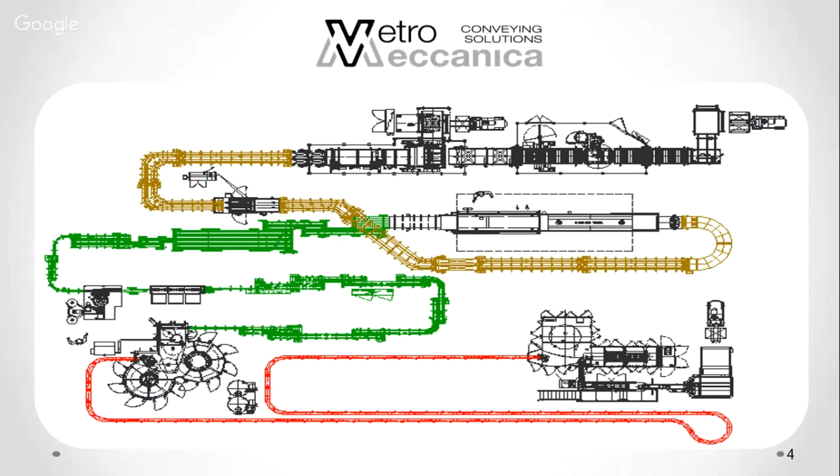Today, Daniela Rinaldi is the sales manager for Vetromeccanica since 2004 and the CEO since 2007. Today she is going to be our presenter. Daniela is a Pavia College graduate with a bachelor's degree in economics and a master's degree in development of small and medium-sized enterprises. Her first role at Vetromeccanica was sales manager, a position she started back in 2004.

Daniela is Vetromeccanica's CEO, a position she adopted in 2007 and has held for 10 years. She is responsible for leading the development and execution of the company's long-term strategy, such as development of custom conveyors and conveyance systems with a strong determination on improvement and development. With all that being said, I will now turn this over to Daniela, and she is going to get much more in-depth on what Vetromeccanica can do for your conveyance solutions. Go, Daniela.

What you see there is an example of a bottling line, from a blow molder till the palletizer. We are in charge of all the conveyors in between the machines. That means manufacturing and engineering, mechanics and automation, and the engineering of the system, because the most important thing in a line is the accumulation and the buffer between the machines.

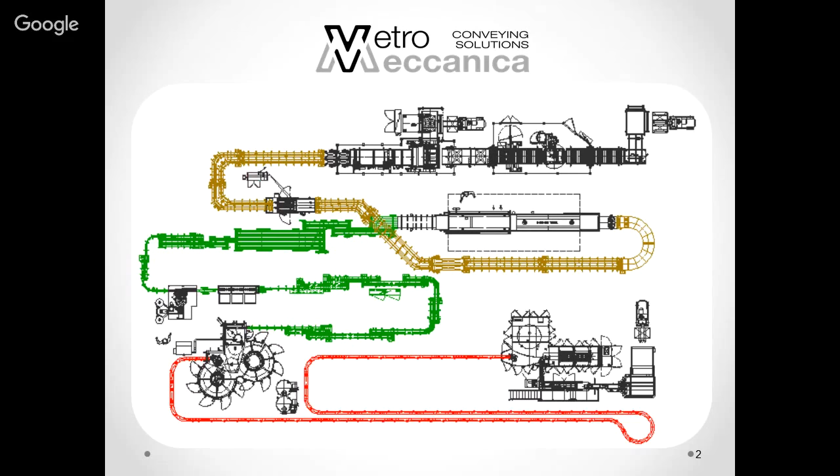We are located in Parma. All this data Maribeth told you before, so it's quite easy to go ahead.

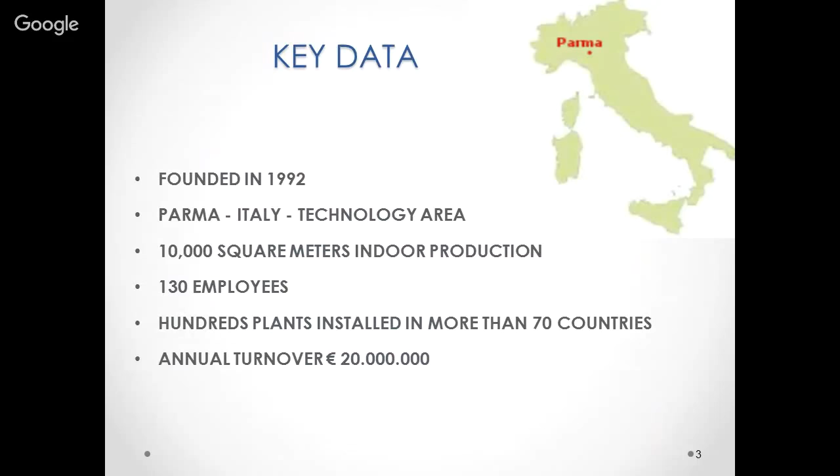We supply engineering and new conveying solutions. We have a pretty complete service, from the technical department till the commissioning of the line. So we can follow the customer from the beginning till the end, from engineering till commissioning. And after commissioning, because lines need upgrading and maintenance, and all this to keep the good efficiency of the line.

We have the help of many technicians all over the world, in North and South America, Middle East, Germany, and North Africa, and we can grant remote assistance from Italy.

What we do is quite unusual, because we manufacture everything inside. It means we begin from the stainless steel sheet and develop all the solutions inside. This means tailor-made and customized solutions, and short delivery terms. For example, our medium delivery term is 45 or 60 days from the PO.

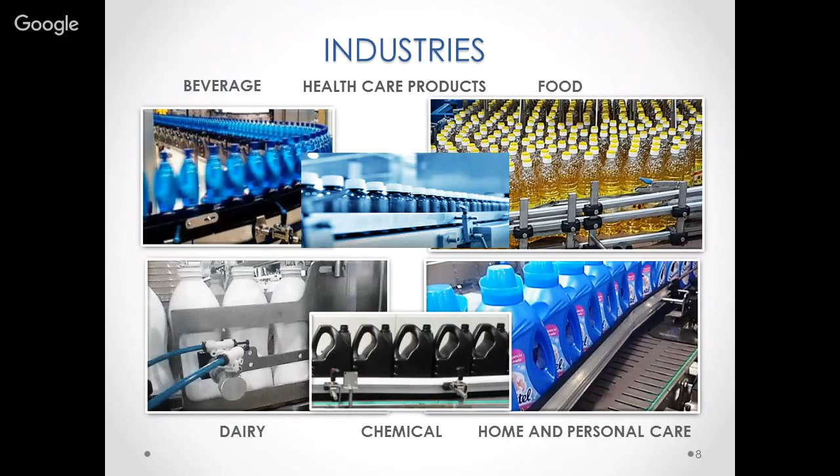We are dealing with different industries: beverage, as I told you, healthcare, food, chemical, dairy, and home care and personal care. This means everything can be moved: bottles, cans, containers in general, full and empty.

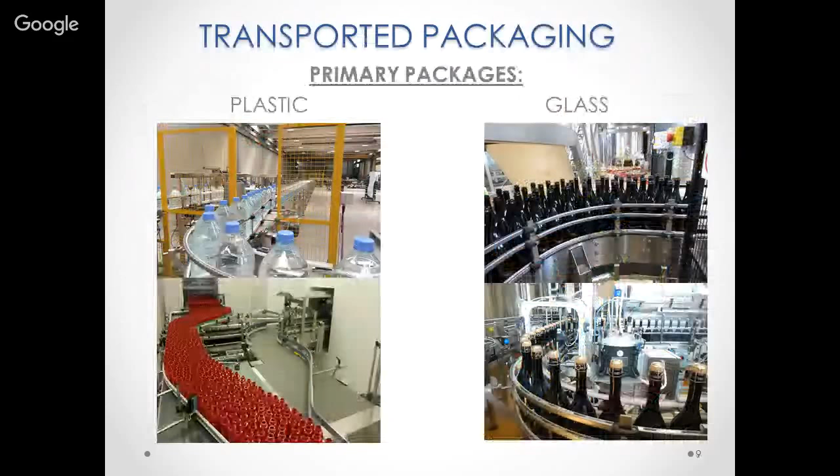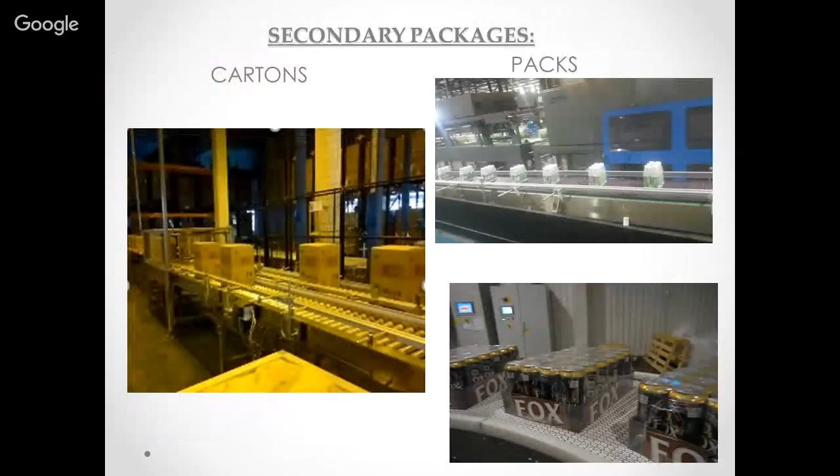Different materials too: plastic, glass, and again cans, empty and full. Flow pack, I forgot, jars, and everything else. And then we move also packs, cartons, shrink packaging, and everything that is in a box, more or less.

We have a quite big product range: bulk conveyors, air conveyors, tabletop conveyors, and can conveyors. It's all conveyors. Dryers are machines you can install just before, upstream of a labeling machine, to dry a bottle or container before putting on a label, because if the bottle is wet, the label cannot be attached well. Then there are dividers, aligners, and all this stuff related to the conveying system inside an industry.

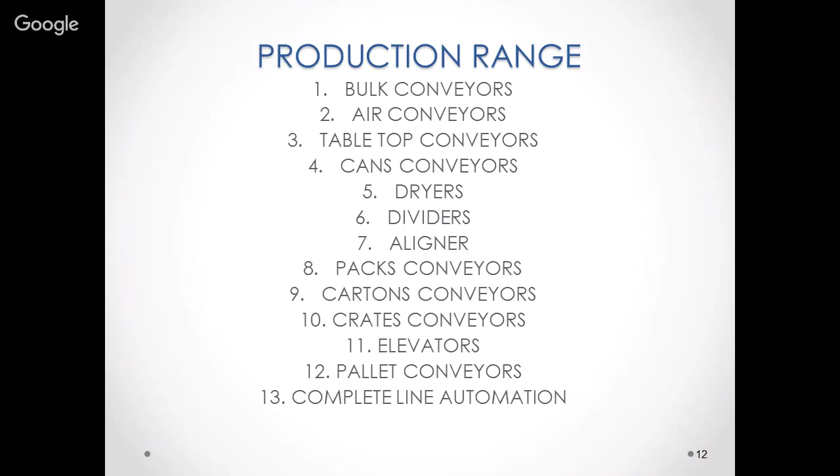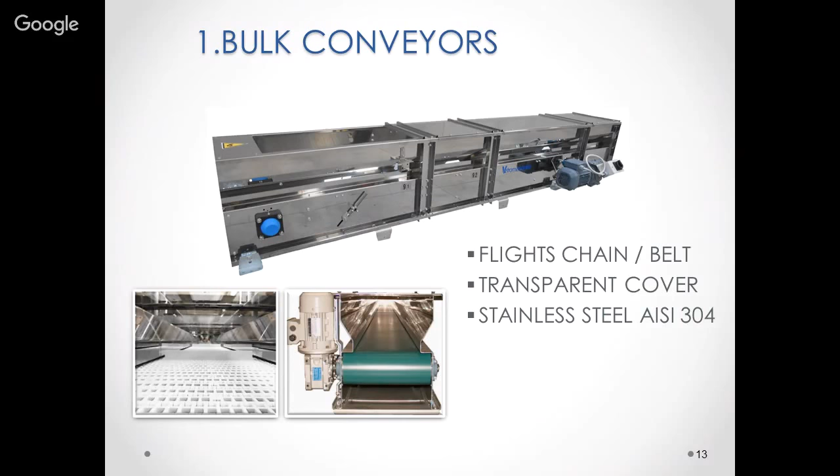We have air conveyors, our first product. We began several years ago with this product. We move empty bottles from a blow molder to the filler, moving them with air. This is our core business and has been for years. So we are very specialized, and I think on the market we are the best solution in terms of quality, price and delivery terms, because we were very specialized for a very long time.

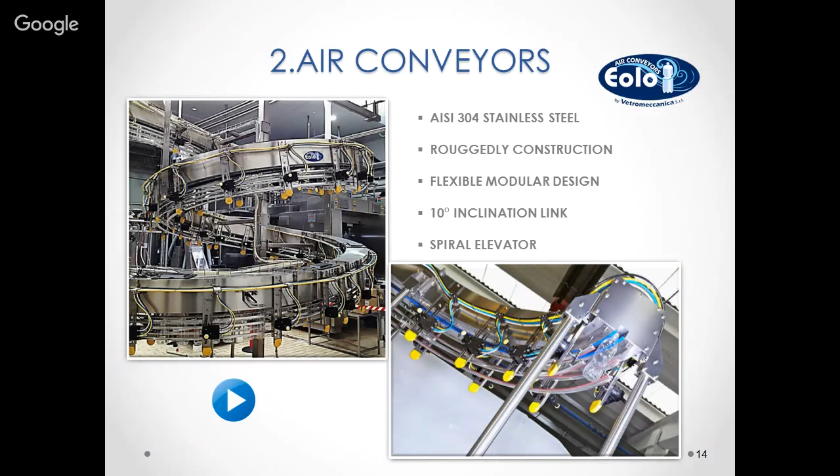All this stuff are items and devices that equip our air conveyor. For example, I can show you a short video just to give you an idea of what an air conveyor is and what you can... no, it doesn't work, I'm sorry.

What you can move - on the left you will see a standard air conveyor system equipped with this pneumatic actuator device that we call the Eolo moving device, which is a patented system that allows adjustment of different body diameters with the same items. We have special neck guides with this plastic material, we have cylinders, and in general different types of guide registration, from the simple to the most complicated one, which is the EMD.

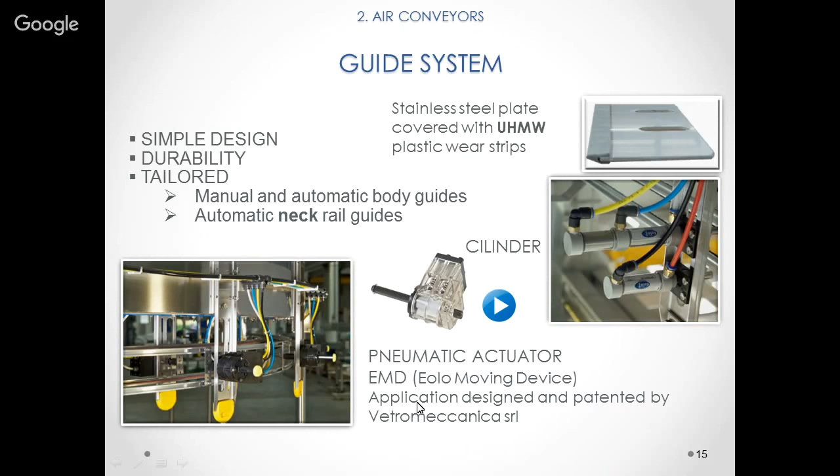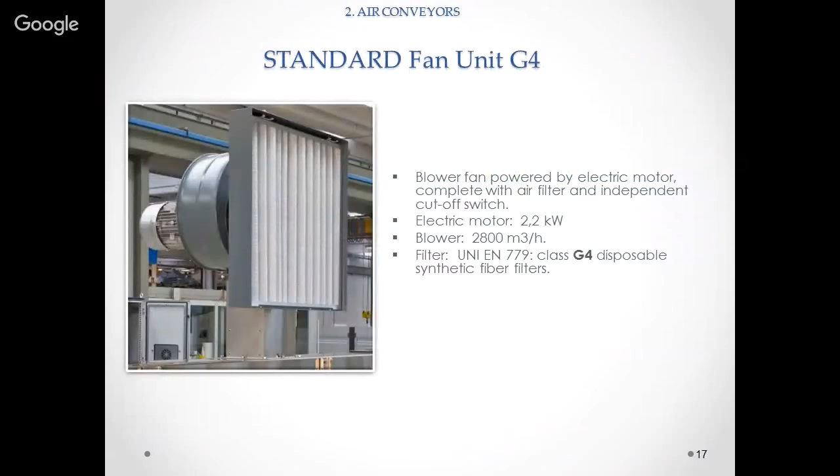This is the time of changeover. On the air conveyor, you can have different types of filters, from the easy one, which is a G4, till the most complicated one, which is a 3-stage filter: G3, F7, H14.

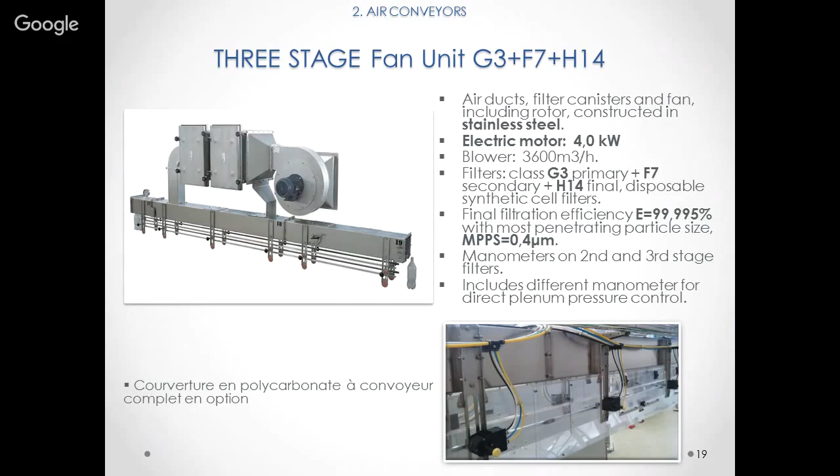This is for very special industries, for example milk or yogurt in general, when you need very good filtration because of bacteria or contamination. So you have to be sure the air inside the air conveyor is as clean as possible. You also have the possibility to cover the air conveyor, just to protect it from dust.

Then we have tabletop conveyors. Once a bottle has been filled by the filler, you have to move the full bottle from the filler to the labeler. For example, a Coke bottle has been filled, then you have to put the label all around the bottle, and you need conveyors doing that. We have all this stuff - they are not just simple conveyors but whole systems, because you have to accumulate bottles and then align them, since when you have a very high speed line, you need a big buffer between bottles.

Just one second, I was trying to show you a video, but it doesn't work.

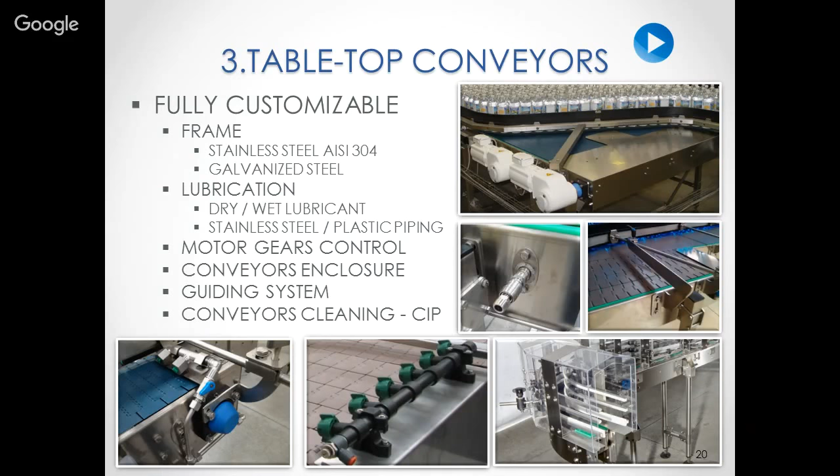So vacuum conveyor, this is a different industry, used for home care or personal care. This is a line we sold a couple of years ago to Heinz, for ketchup if I remember well. It's a vacuum conveyor because these bottles are empty. They cannot be moved using an air conveyor because they have no ring on the neck, so they can't be suspended there, but they can move on the tabletop conveyor. Since they are empty though, they will fall down by moving, so we are obliged to apply this vacuum system to keep the bottles just

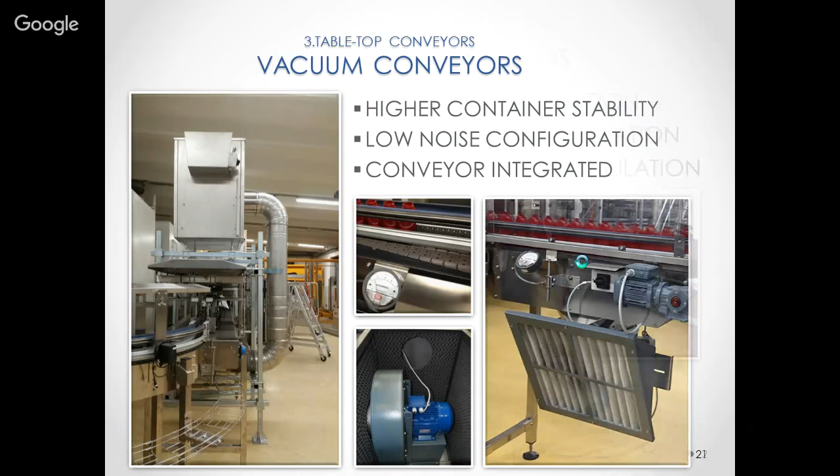in contact with the plastic of the conveyor. You will see there are holes on the chain, and underneath there is a motor doing a vacuum. Then we have the accumulation system.

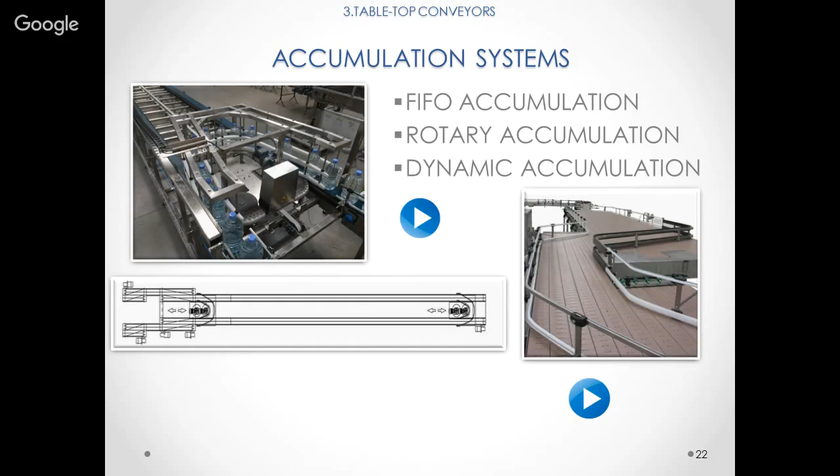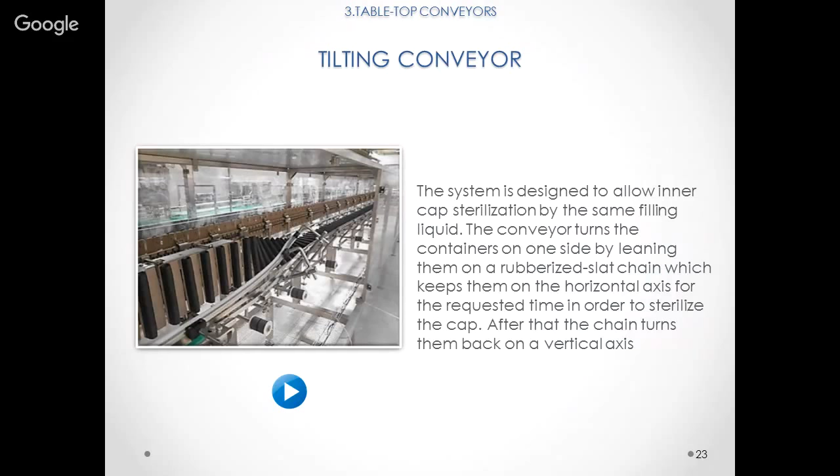This is a special equipment we call a tilting conveyor. It's designed to allow cap sterilization. When you have a hot filling system, the liquid inside the bottle is hot. You tilt the bottle and the hot liquid will touch the cap. This way you can sterilize the cap and avoid bacteria on it.

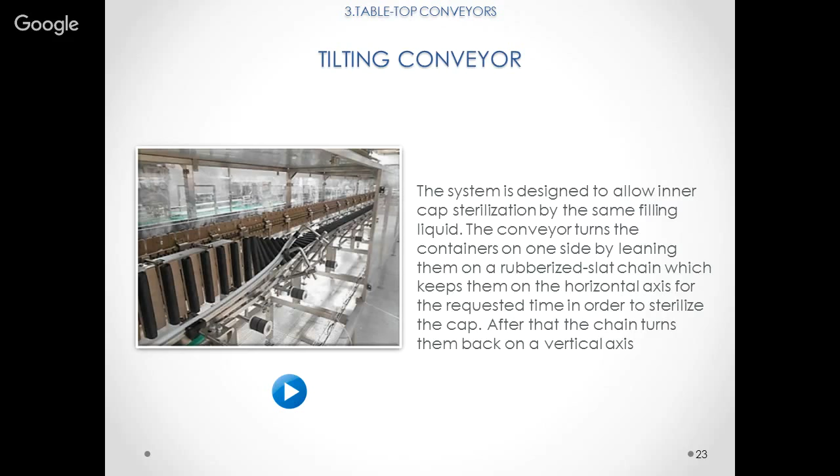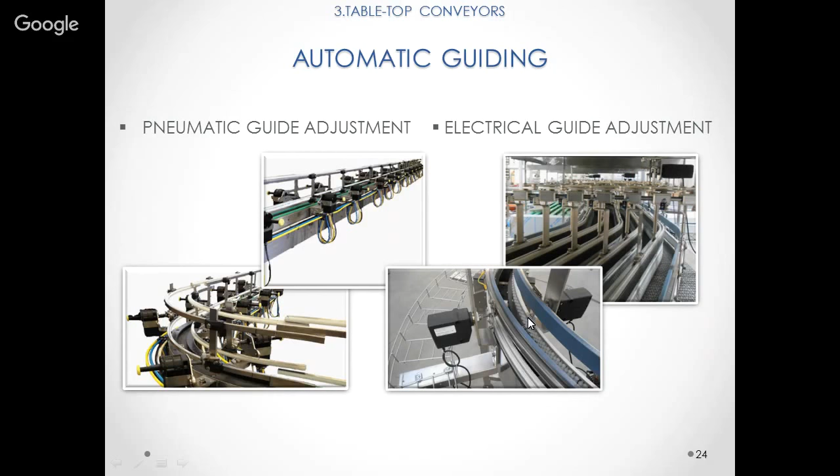This is automatic guiding. On the tabletop conveyor, you have different ways to adjust the lateral guide, from the simple pneumatic one to the more complicated electrical one. So there are motors that can do a job that otherwise should be done by the operator.

This is can conveyors, so particular items related to the conveying of cans.

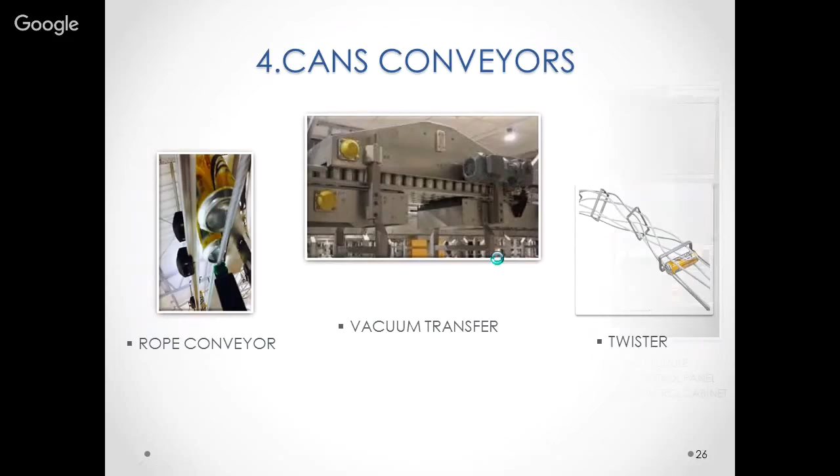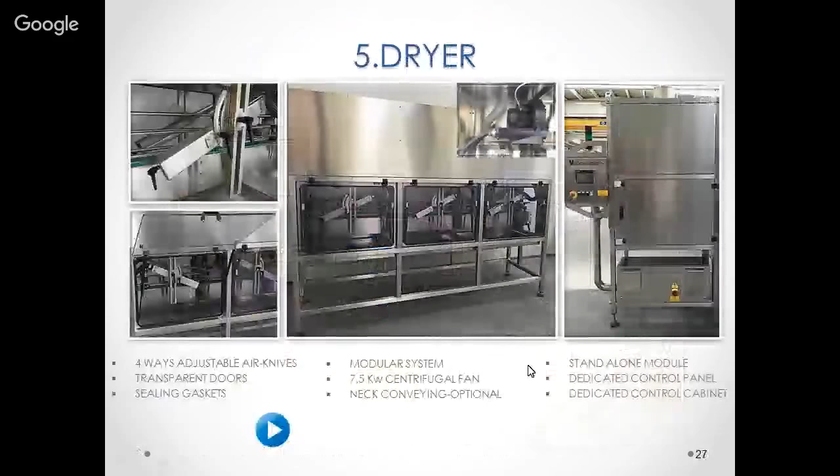Dryers are used before the labeler. You should dry the bottle before putting the label. We developed the system in modules, each module is 1 meter long, so you can choose how many modules to put on the line with reference to the speed and the bottle condition, if the bottle is wet, how wet, and how it needs to be dried. We can supply it standalone with its electrical control cabinet, or inside a general system, everything in stainless steel, and there are some options dedicated to the particular bottle that needs to be dried.

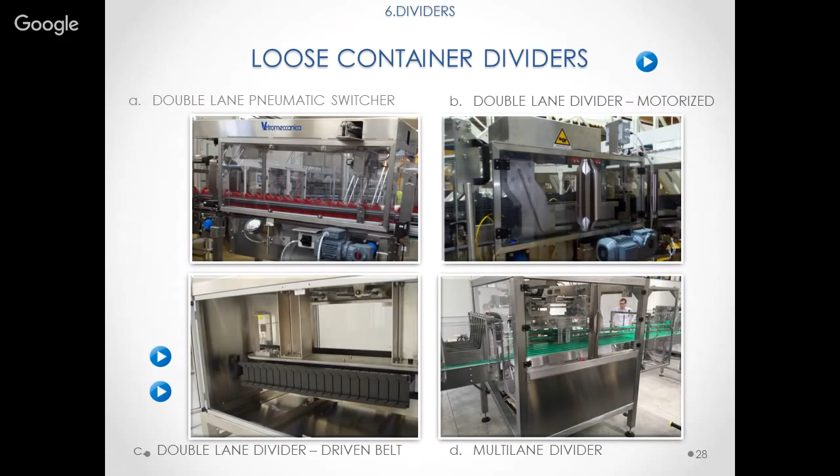We have different dividers. In a bottling or packaging line, you need to divide bottles, so we have different systems again with reference to the speed of the line, so we can offer the customer different possibilities. We have pack dividers, for example when you have a pack or shrink pack and need to divide at the inlet of a palletizer. This is a solution: packs arrive in one row, and I divide them into two rows.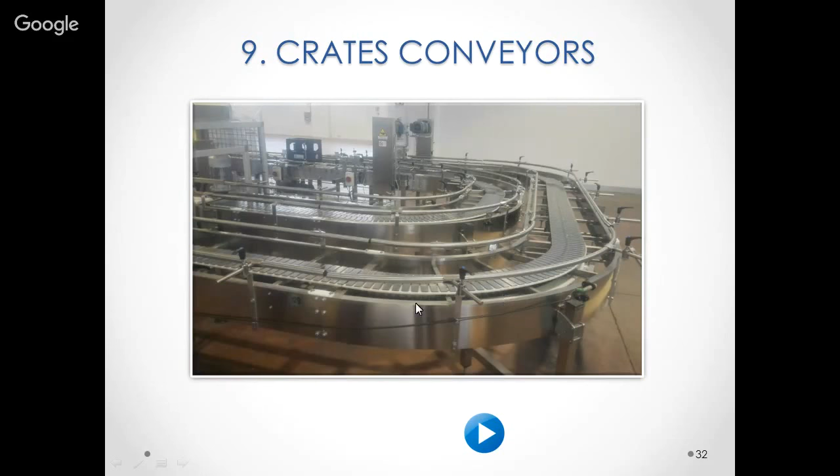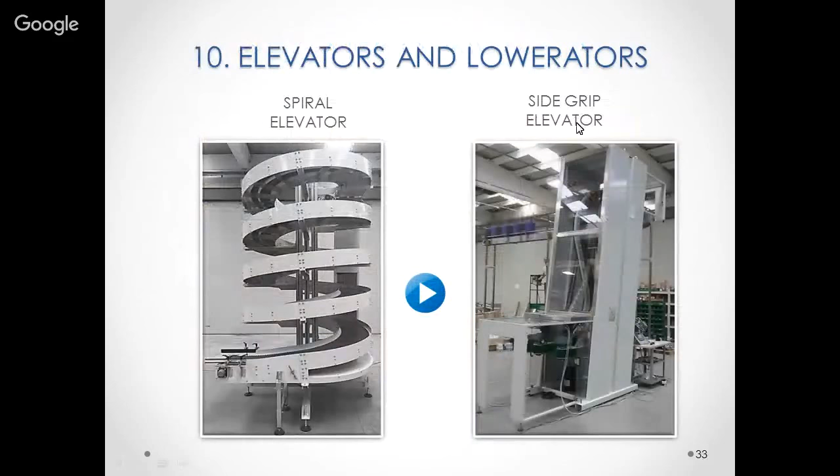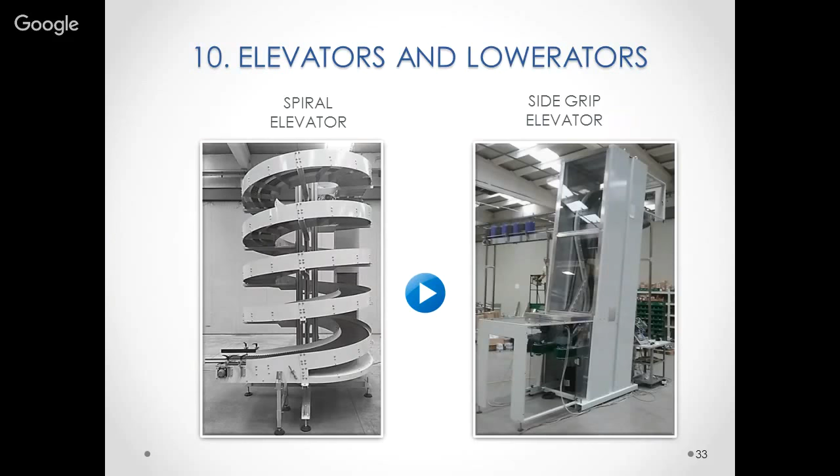We have this spiral elevator or lowerator, and also the side grip elevator or lowerator, to find a solution when you have different floors, different levels inside a building, and you have to go up and down with bottles or packs.

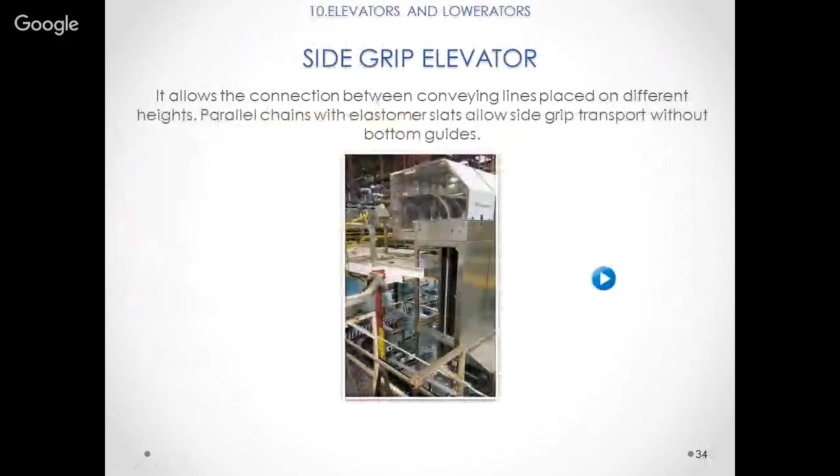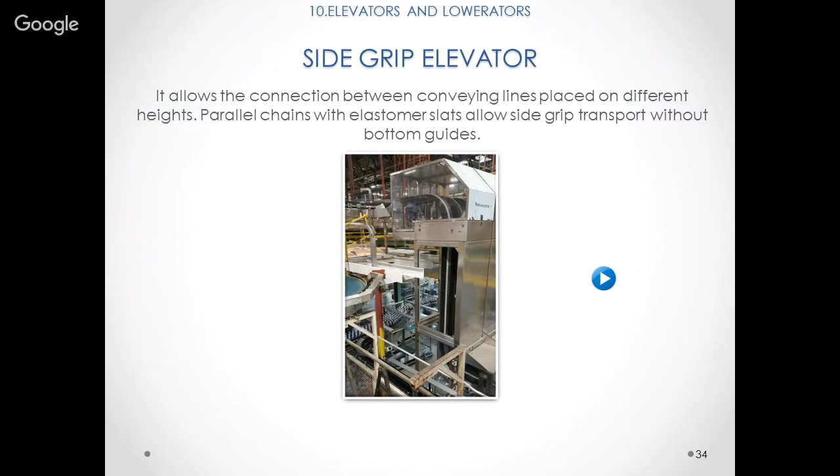We have this side grip elevator, especially for bottles. This installation is in Coca-Cola Puerto Rico, where we had to join the second floor from the first floor, so we installed this side grip elevator. This is for bottles, not for packs. There's also a pallet conveyor, but that's not so interesting.

The most interesting part is the line automation, because from this very big electrical control cabinet we can control every motor of the line. We have a touch screen with different recipes, we can supply a remote assistance module and a line monitoring system. Each line and each motor is equipped with a frequency inverter.

And we can supply a PLC system either with European standard, so Siemens, or US standard, that is Allen Bradley.

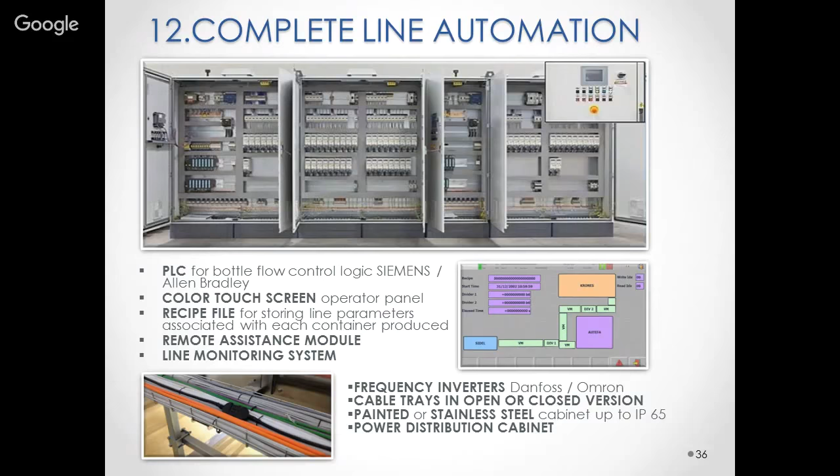As I told you at the beginning, we are quite different from the market because we manufacture everything inside. This means we have inside our production also the machines to cut, bend, and weld all the stainless steel we use in our facilities. These are pictures of our facility.

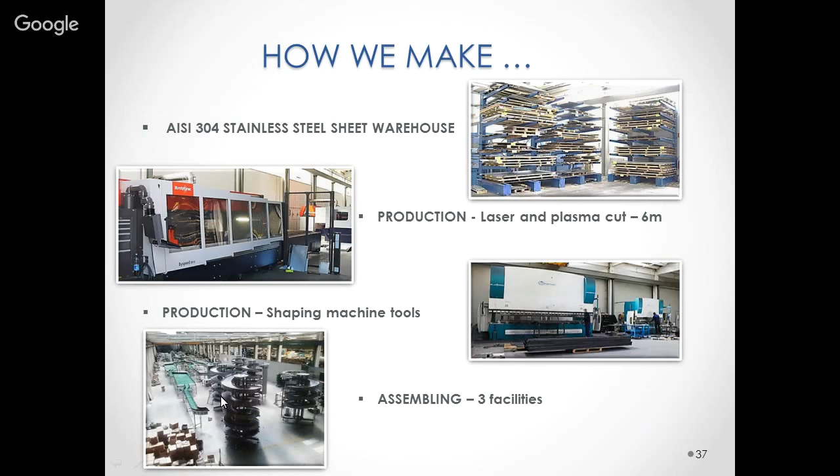This is a laser cutter machine. This is our stainless steel store magazine. This is our production facility. This is a bending machine. And that's it for the moment.

Hello? Yeah, if there are any questions from the audience, I'd like to see them. I don't see any activity on the live chat at the moment. Okay, are we back to my screen then? No questions? Can you hear me? Yeah, good.

No questions came in. Okay, well Daniela, you must have done a very good job then if there aren't any questions. I'm sorry, but I don't know why this video doesn't work. I tried this morning and everything worked, so I don't know why. Yeah, that would have been nice to have a video, and if it gets working by the time we're done, we can go back to you. That's no problem, but thanks so much for your comprehensive overview. I guess it was so comprehensive we didn't have any questions.